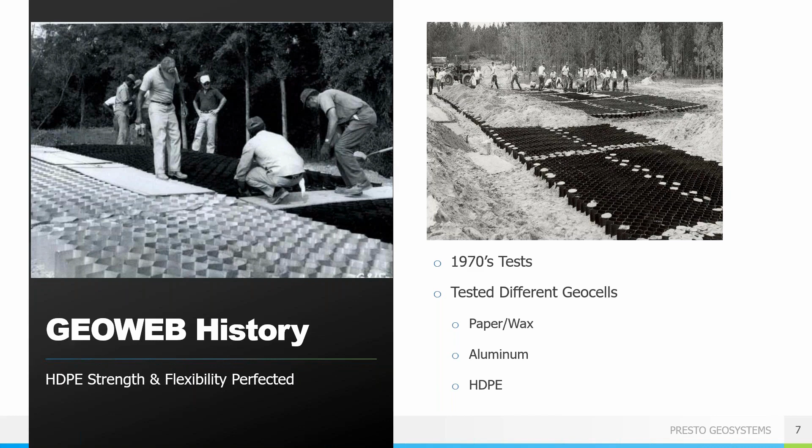As I mentioned, Presto worked with the Army Corps of Engineers to develop geocell technology. While other materials such as cardboard and aluminum were tested, high-density polyethylene, or HDPE, was the chosen material due to its lightweight, flexible nature and the fact that it is inert to nearly all chemicals and climate conditions.

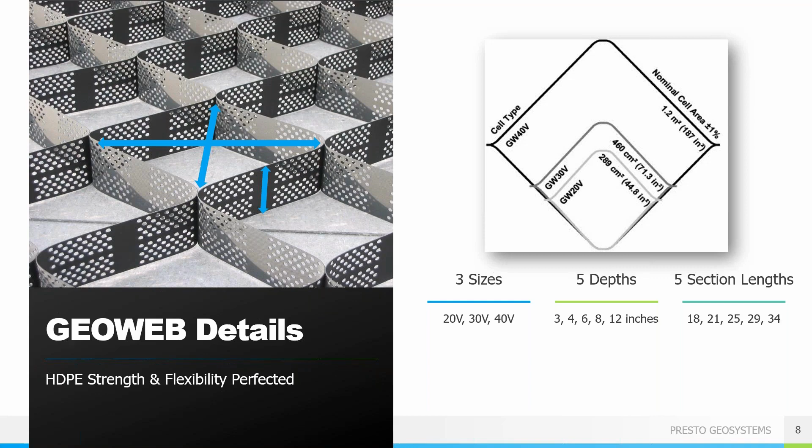The GeoWeb system consists of 2 main attributes: cell size and cell depth. The cells come in 3 diameters: small, medium, and large, which we refer to as our 20, 30, and 40V, and heights of 3, 4, 6, 8, and 12 inches. Cell aperture and height are selected following an evaluation of project-specific needs and site conditions. To facilitate installation, we offer 5 different section lengths, which will help to minimize the amount of field cutting that needs to be done.

The ultrasonically welded seam, where all of the connecting points are, is very important to the function of a geocell. The stronger the seam strength, the better the performance of the geocell will be. A strong seam allows for heavier infill material, steeper and taller slopes, and better lifetime performance. GeoWeb is produced using high-quality virgin, high-density polyethylene resin for consistently strong welds at cell junctions, while also maintaining semi-rigid ductile properties within the cell walls, high stress crack resistance, and overall toughness and long-term durability in the environment.

Our geocells do not use fillers or exotic polymer alloy blends, which can ultimately reduce weld strength and environmental stress crack resistance, and that are offered in some competing products in the name of increasing cell wall stiffness. To avoid weld failures and the damaging effects of differential settlement, uniformity in performance across all elements of a geocell system is much more important than stiffness alone.

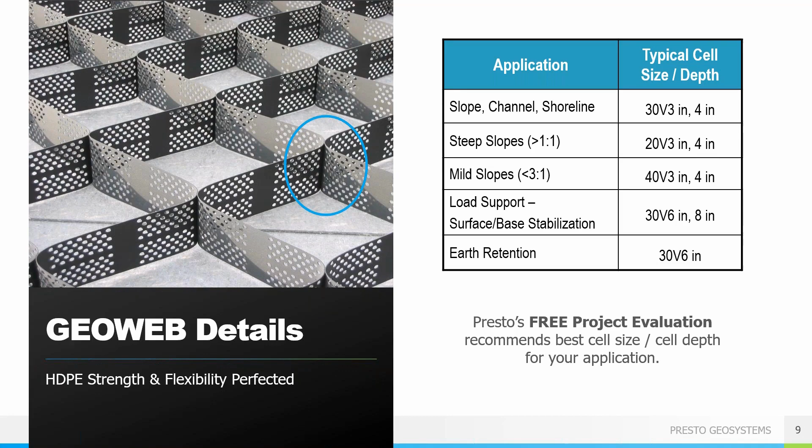There are three main infill types for any GeoWeb application, depending on the type of protection needed: topsoil, aggregates and granular soils, and concrete. In most cases, geocells allow for the use of on-site materials without the need to import fill, generally with the only limiting factors being that the material should be angular and the maximum particle size should be about 1/3 the cell depth.

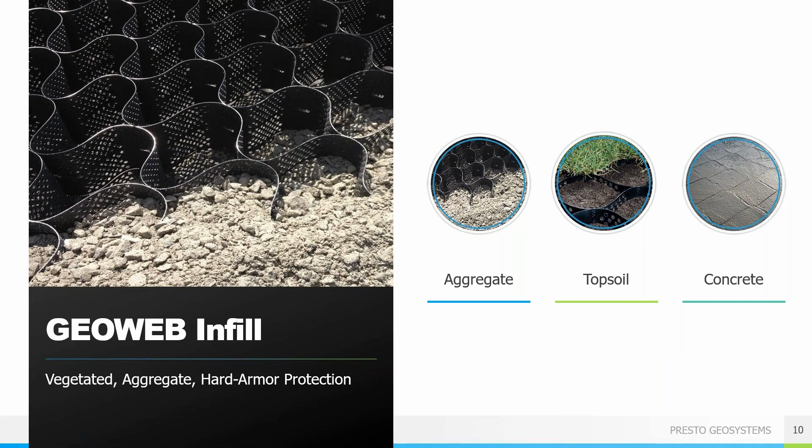The nominal width for each section is 8.5 feet. But you can make them longer and skinnier or shorter and wider, but we do want you to keep that width dimension between about 7.5 and 9.3 feet. The length will depend on the amount of expansion and the number of strips welded together.

Standard length is about 27 feet, but they can go anywhere from 16 to 58 feet. And then we can fit about 100,000 to 200,000 square feet on a truckload, depending on cell size and cell depth.

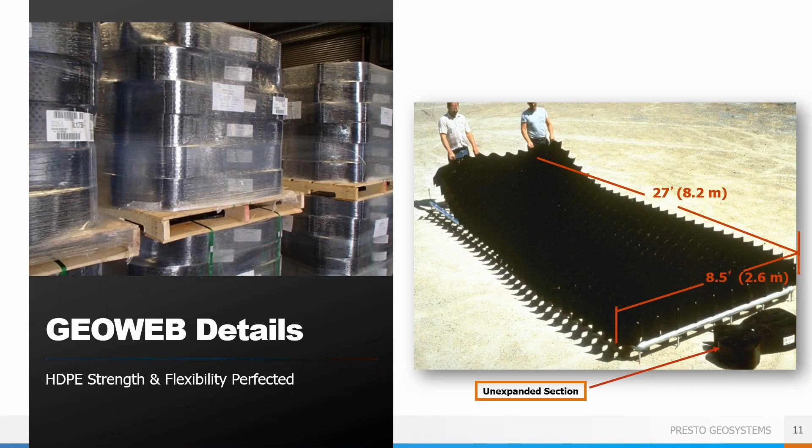In order for a geocell system to perform uniformly, it is critical that both the factory welded junctions or internal junctions and field joint junctions that connect individual panels, the mechanical junctions, perform at a level that is commensurate with that of the cell walls.

The three primary elements of any geocell system, cell walls, internal junctions, and connectors, must perform uniformly as a complete system. Therefore, an incremental improvement in one characteristic is only valuable if a complementary improvement has been made to the other components of the system.

GeoWeb is manufactured using a proprietary blend of high-quality virgin HDPE, and our formulation has stood the test of time for more than 40 years, and again, contains no fillers, unstable polymer combinations, or exotic polymer alloys.

For most typical sites, GeoWeb will retain its durability, with lab testing indicating 149 years without degradation, even at full exposure to the elements. We stand behind our numbers so you can deliver certainty in the solution as you build with materials you can trust.

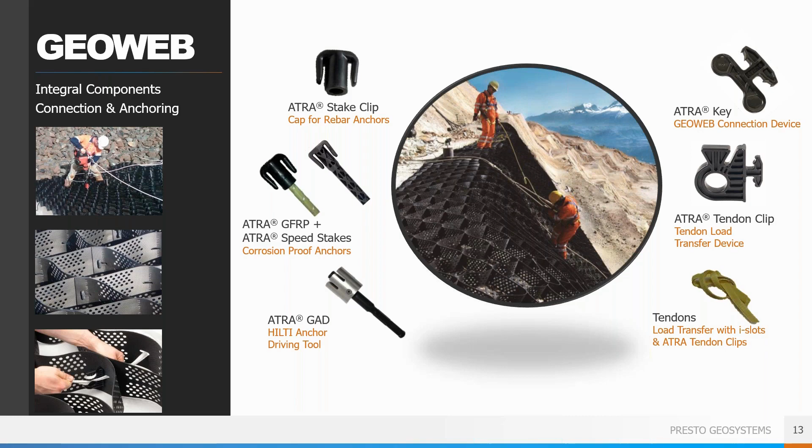Presto's GeoWeb is equipped with numerous design and construction components that increase strength and speed of installation. We have a variety of staking options, with the standard method being to use our Atra stake clip on top of a 1/2-inch diameter rebar. But if long-term corrosion is a concern, we can also provide fiberglass reinforced or plastic stakes.

Atra keys are the mechanical connection that I mentioned in the previous slide. Not only do Atra keys provide the uniformity we discussed, but they are made of the same HDPE material as the GeoWeb itself, so will last just as long. Beware of manufacturers that recommend staples or nylon cable ties, as these do not have the same long-term durability as HDPE.

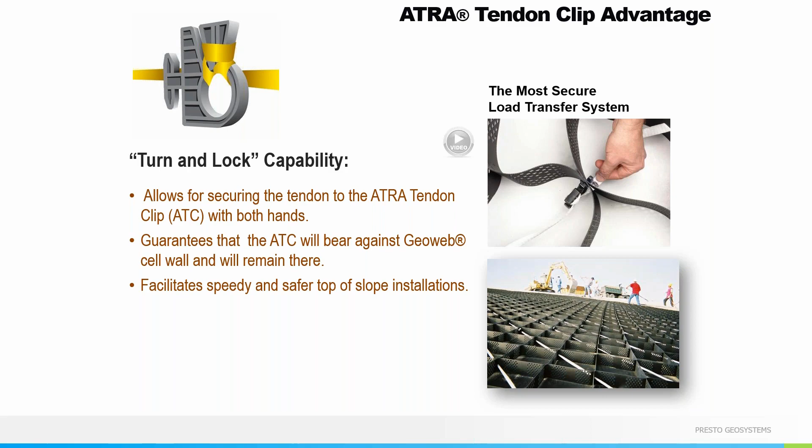The tendon and ATRA tendon clip system is ideal for anchoring the GeoWeb on slopes without the need for stakes, which would penetrate the liners that are used on most landfills. The tendons are tied to either earth anchors or a deadman pipe, which can typically be buried in the same trench as the liner at the crest.

Now we'll go a little more in depth on each of the landfill relevant application areas, starting with load support. GeoWeb can be used for both surface stabilization of unpaved roads and base stabilization below pavements. Many solid waste facilities must contend with maintaining unpaved access roads.

Not only can GeoWeb save money up front by allowing you to reduce your overall cross section, but incorporating GeoWeb into the roadway section can also minimize or reduce annual costs associated with repair and maintenance of unpaved landfill roads that take a beating from heavy equipment and truck traffic.

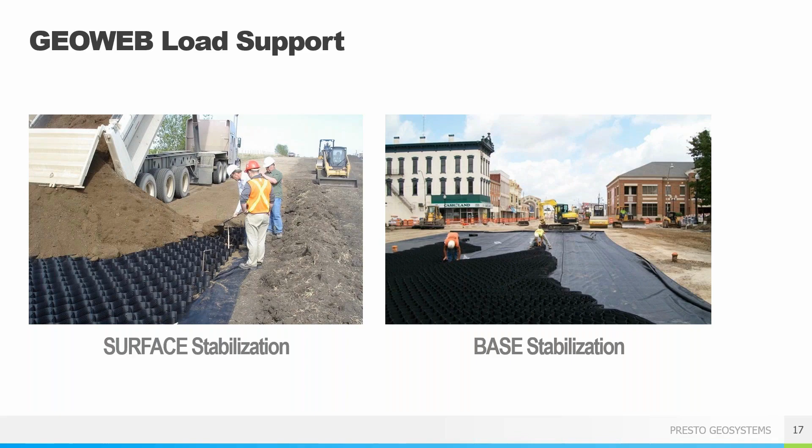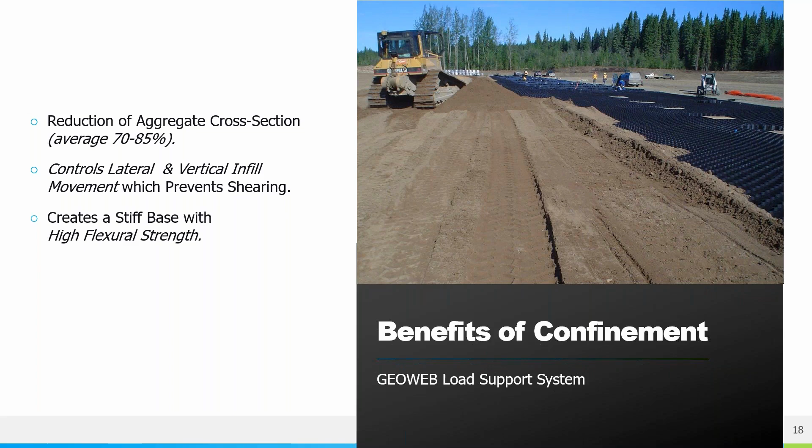Generally speaking, the benefits of using GeoWeb in load support applications are it will allow you to reduce your overall aggregate cross section by 70% or more. It'll control lateral and vertical infill movement, which will prevent shearing, and it creates a stiff base with a high flexural strength.

Here's how the GeoWeb three-dimensional system works in load support. When a vertical load is applied, the active earth pressure in the loaded cell pushes back against the passive earth pressure in the adjacent cell to form a stable system. So each cell helps support the ones around it.

The GeoWeb cell walls also transfer hoop stress, which is important in keeping the system intact and creates a mattress effect. The strength of the seams around each cell, the material properties of the individual strips, and the connection method between panels are all important factors in determining how the Geocell system can improve site conditions. Strong seams, semi-ductile resin properties, and integrated connections are critical to a well-performing system.

The GeoWeb system and accessories are specifically designed to work together to be an effective solution for roads in soft soil locations.

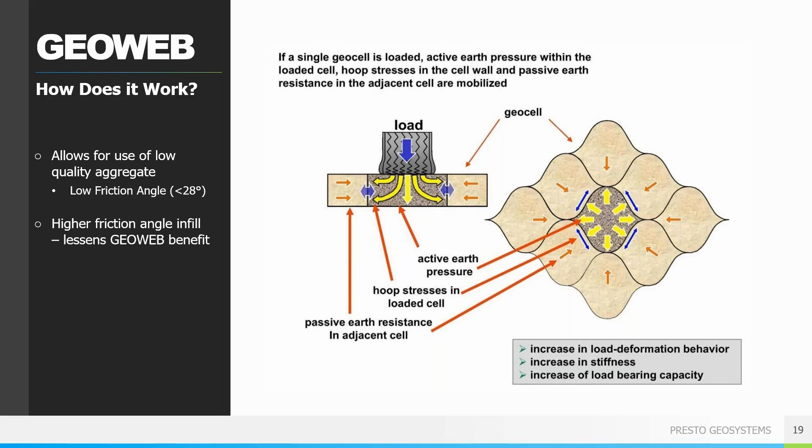Here you can see the stresses on the subgrade, with the unsupported subgrade on the left and the GeoWeb reinforcement on the right. Notice how there is a complete elimination of the highest stresses at the surface when using GeoWeb reinforcement. The stresses are reduced and distributed over a wider area, known as the mattress effect. This mattress effect reduces the stress reaching the subgrade and leads to a significant decrease in deflection and rutting.

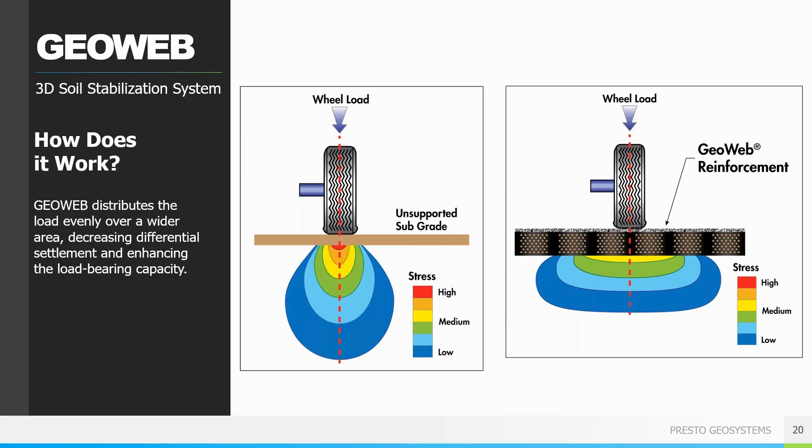I want to quickly review a little of the research that we've done in the past to help increase your confidence in the use of GeoWeb.

This first test started with a supersaturated peat mixture that was put under varying loading. Over the peat, the GeoWeb section was placed and infilled with gravel. Settlement plates were placed throughout the GeoWeb section prior to its placement, and a load beam was placed over the GeoWeb and loaded to failure.

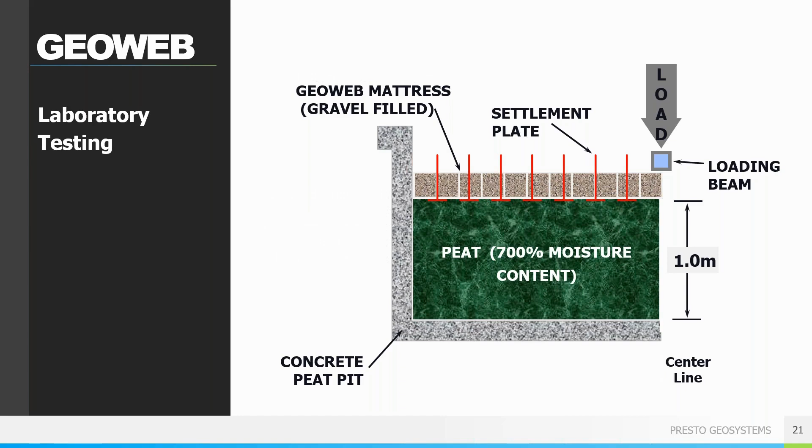We compared this to the same depth of unconfined aggregate. The peat pit test showed that bases reinforced with GeoWeb provide a significant improvement over unreinforced soils. For a loading of 1,000 pounds per foot, a 4-inch rut depth occurred with GeoWeb in the section, compared to 20 inches without the GeoWeb.

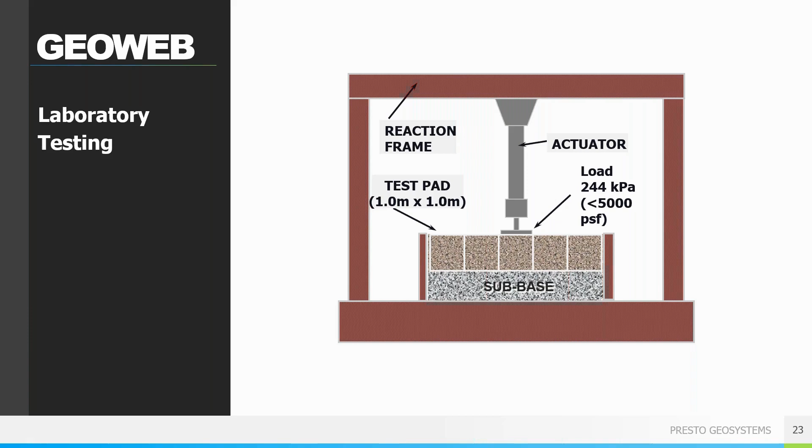Since the previous testing was under static loads, we also went ahead and did a dynamic load test. Here the pavement load testing compared unreinforced and reinforced materials over the same subgrade. A deflection of 0.6 of an inch is assumed to lead to failure of the pavement system, so we applied the load repeatedly until that 0.6 inch of accumulated deformation occurred.

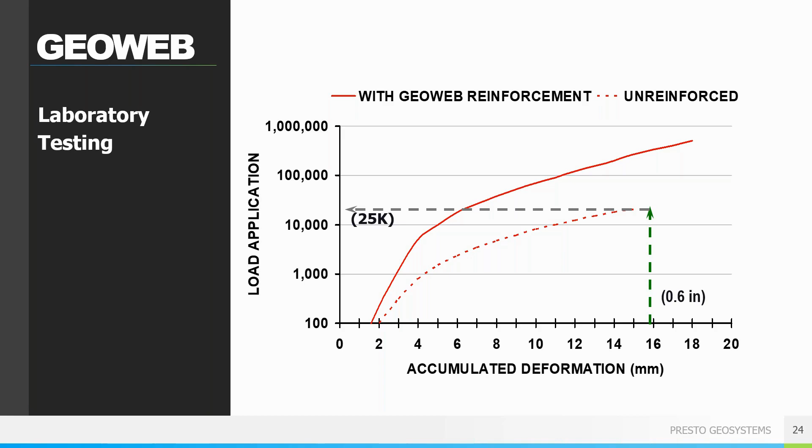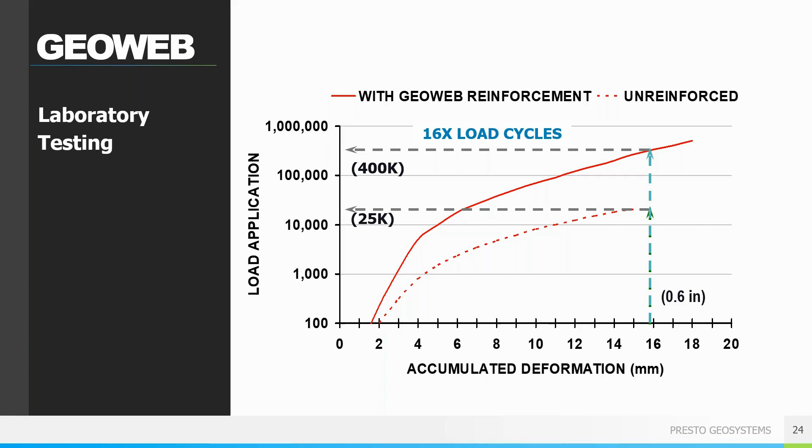Without the GeoWeb in the section, it took 25,000 load cycles to reach this failure point. By adding GeoWeb, we were able to achieve 400,000 load cycles, an improvement of 16 times the number of load cycles for the very same deformation.

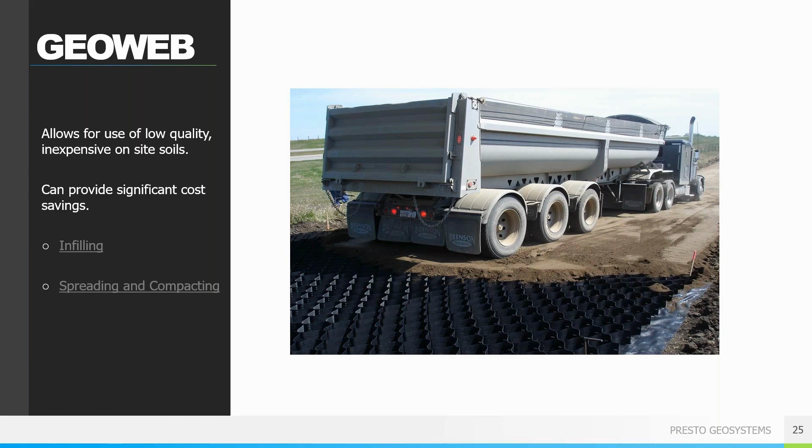A typical GeoWeb section has a geotextile below the cells, which can range from a 6-ounce non-woven up to an enhanced woven, depending on your subgrade strength and maximum loads. Then the GeoWeb is typically filled with granular material, and we recommend a 2-inch wearing surface over the top of the cells.

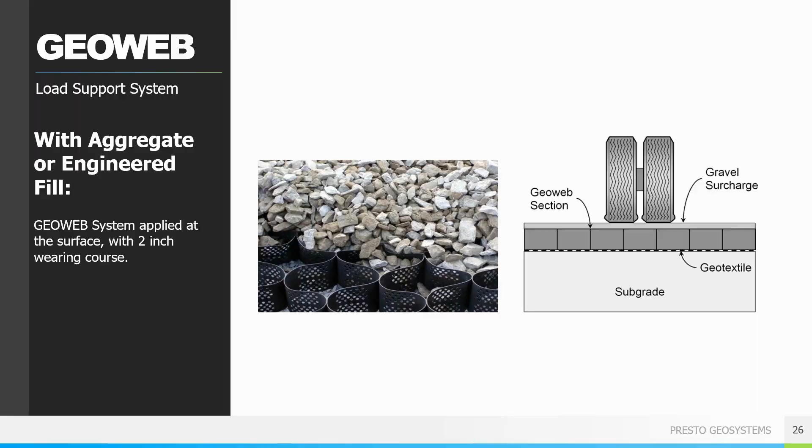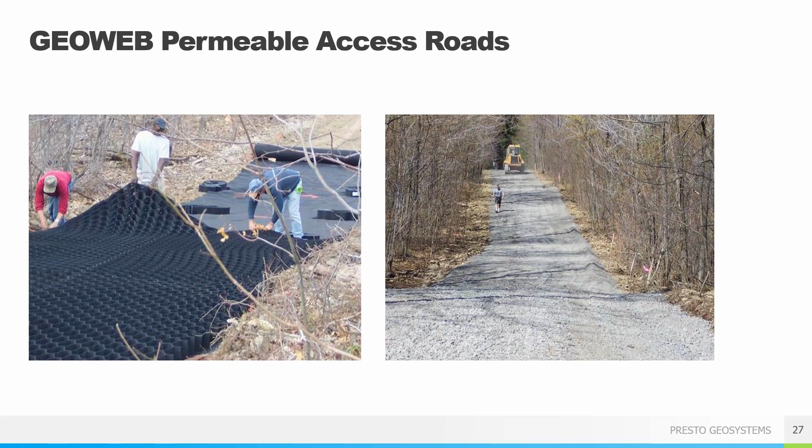Now we can look at a few examples. Here the GeoWeb allowed for a structurally sound road to be built with clean stone infill. Without the GeoWeb, the stone would move with even one vehicle pass. The clean stone and GeoWeb perforations combine to allow this road through a wetland to be permitted, because water can flow through the cross section and we don't create any sort of a dam through the wetland area.

Keep in mind, you get infiltration with clean stone only. The permeability of your infill is going to be your limiting factor.

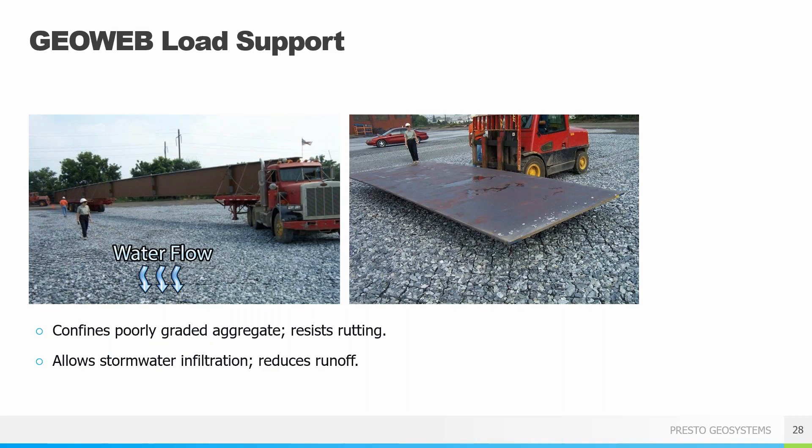Here, an 8-inch GeoWeb and an aggregate with 40% void space was used. This allowed for about 3 1/4 inches of rainwater to be stored in the pavement section, eliminating the need for additional stormwater infrastructure. You can also see the extremely heavy loads that are able to be handled by the GeoWeb system.

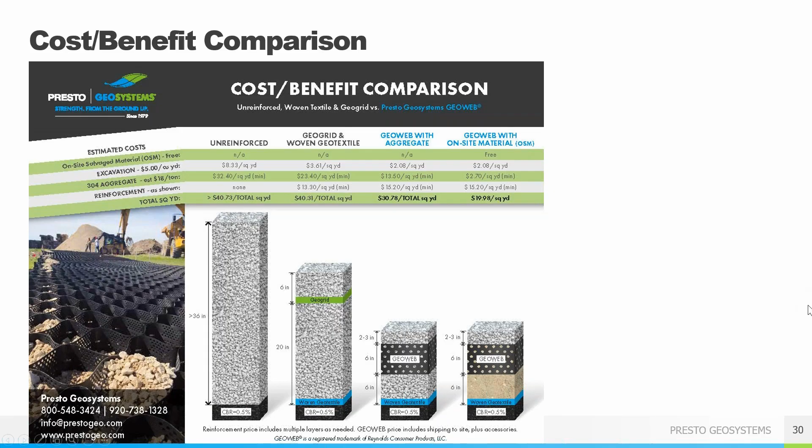We'll now move on to discuss how GeoWeb can be used in stormwater conveyance, a critical component of any landfill design.

Open channel designs with the GeoWeb 3-dimensional system offer a more economical solution than riprap, gabion baskets, or reinforced concrete, all systems that are expensive and hard to place and maintain.

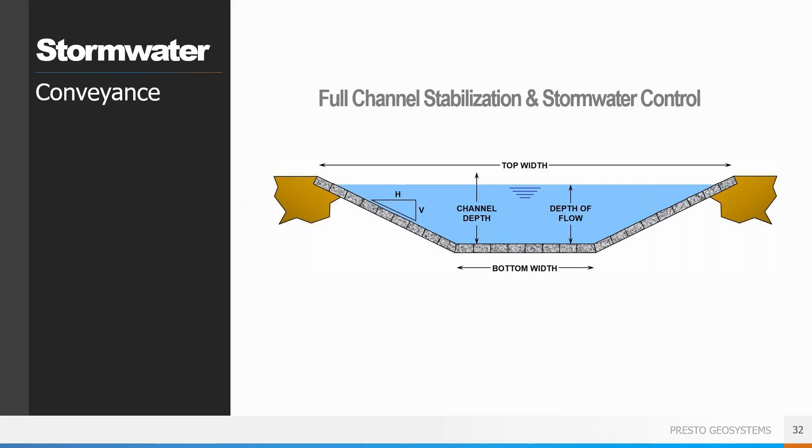The cellular network creates a system of check dams that protect the upper soil or aggregate layer from hydrological erosive forces that impact unconfined material. They're much more effective than two-dimensional solutions such as turf reinforcement mats and erosion control blankets that can be subject to undermining.

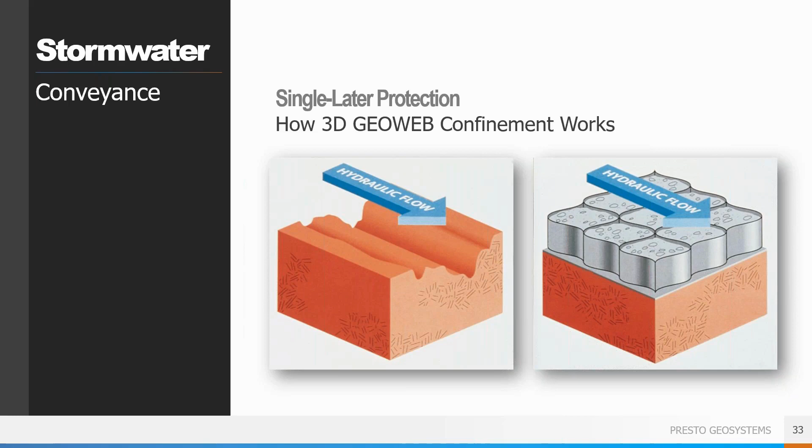The benefits of using GeoWeb in channels include that it will improve the hydraulic performance of whatever infill material you use. With vegetation, we will also promote infiltration and reduce runoff. With aggregate, we can allow for the use of smaller, less expensive rock. And then with concrete, we don't need any other forms or reinforcement. And the system will flex with subgrade deformation, minimizing cracking. Additionally, you can reduce your concrete thickness, leading to significant cost savings.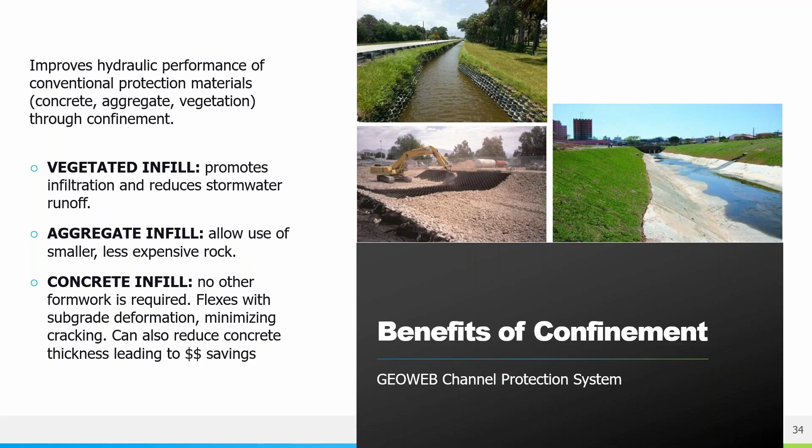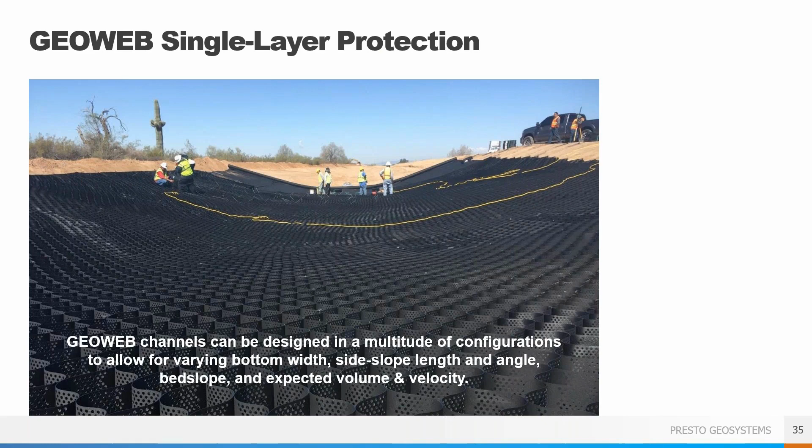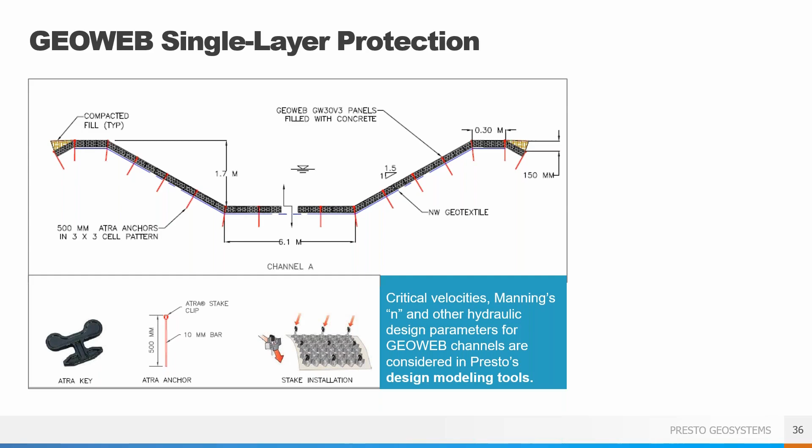Now we'll look at how GeoWeb works with the various infill options, starting with topsoil and vegetation. Generally speaking, low flow channels like stormwater containment facilities and stormwater channels can be armored with topsoil filled GeoWeb and covered with an erosion control blanket.

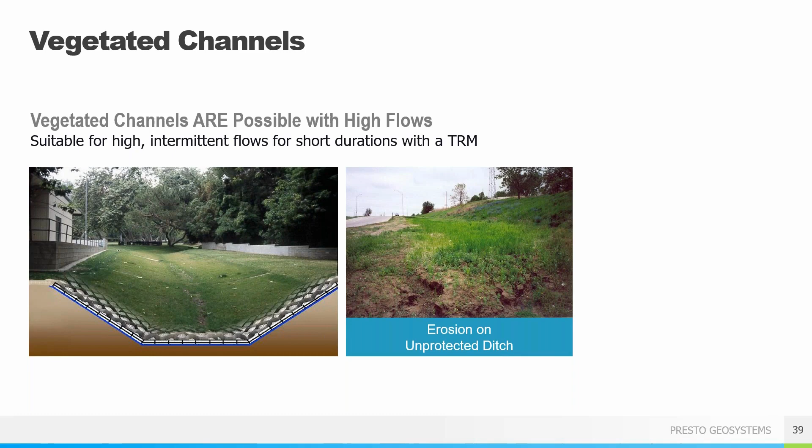But even in high flow situations, we have a solution that can allow you to protect channels from erosion and maintain the aesthetics of vegetation. This solution involves topsoil filled cells covered with a turf reinforcement mat, or TRM.

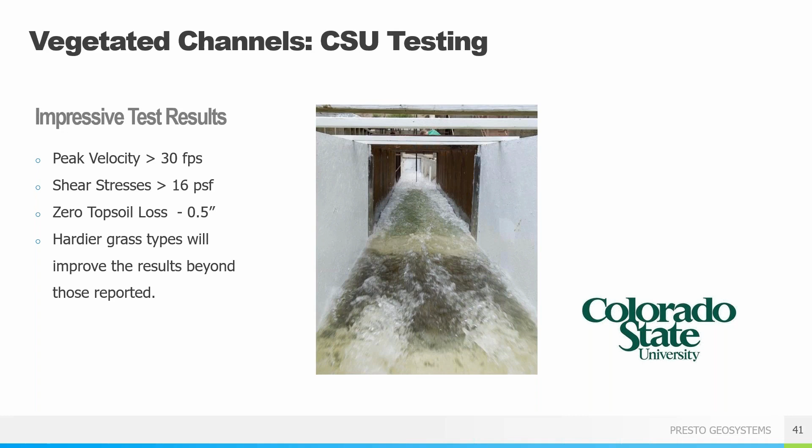We tested this vegetated solution covered with a mid-grade TRM, not one of the newer high performance TRMs, and received great results. You can see that it was able to withstand 29 feet per second and 16 pounds of shear, which is more than twice the hydraulic resistance of 12-inch riprap and about double the performance of the new high-performance TRMs alone. It works so well because the TRM provides a cover for the GeoWeb so the cells won't scour out during high flow.

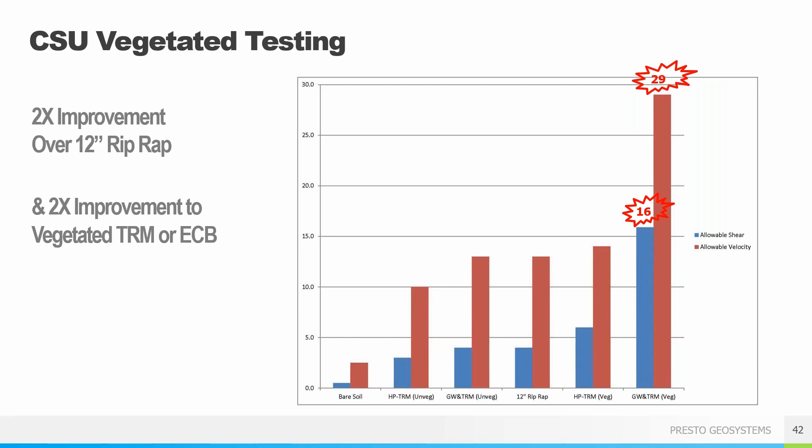And what the GeoWeb does is confine the soil directly below the turf reinforcement mat so the system won't fail when saturated. In an unvegetated condition, GeoWeb will also improve the hydraulic performance of a TRM alone by 30%.

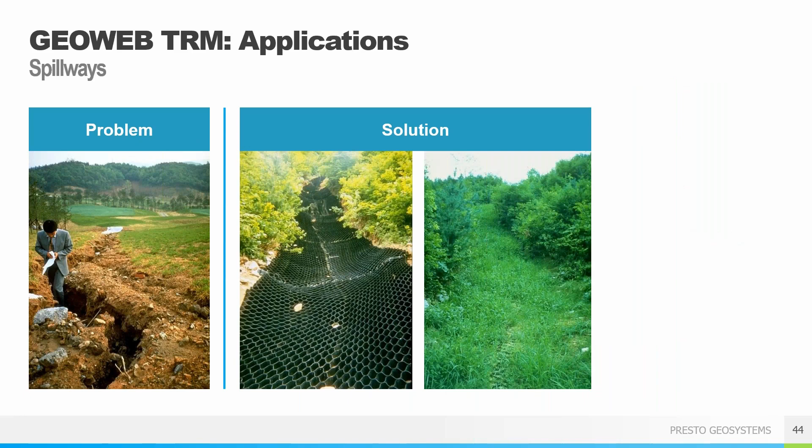Typical applications for this system include roadside ditches, spillways, channel embankments, or dam and pond overflow systems. It's really suitable for any situation where you have very high velocities but short duration flows. And it will allow you to maintain vegetation in areas that would previously have been concrete or very large riprap.

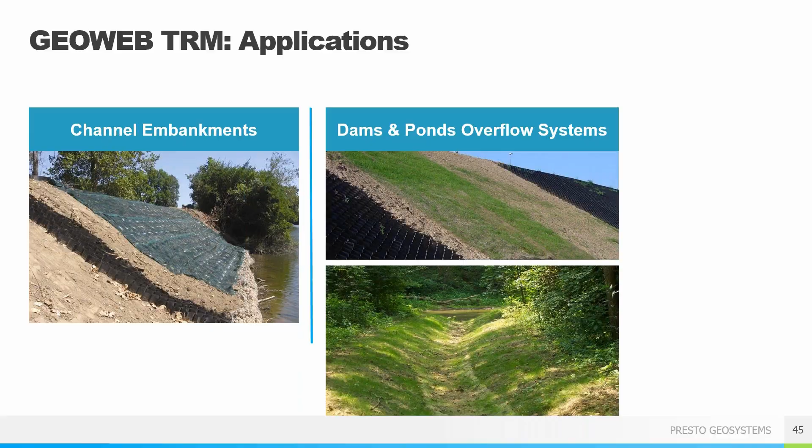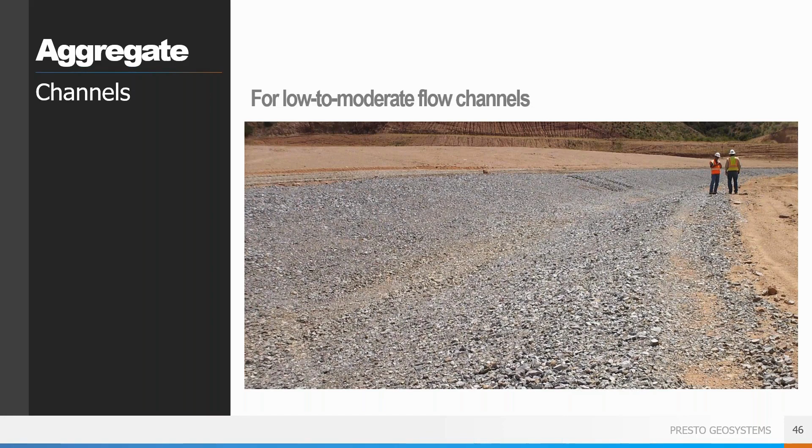We can also provide an aggregate filled solution. Generally, aggregate is going to be used in arid regions where vegetation is difficult to establish, or for areas that are typically underwater and vegetation, again, cannot be established.

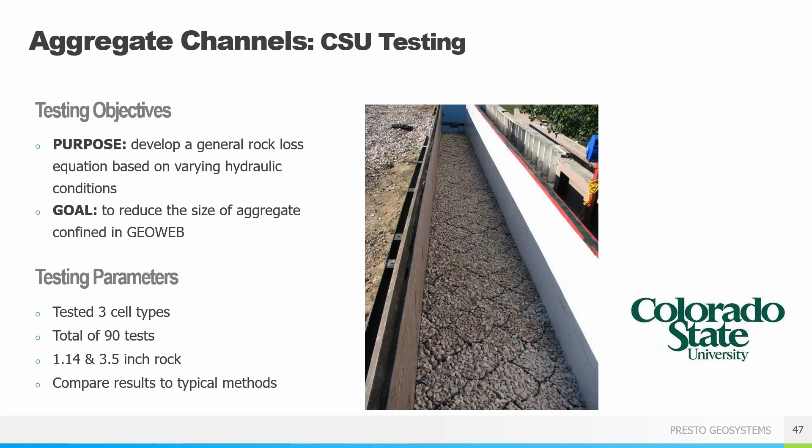So with the aggregate test, we ran a total of 90 different tests using 3 different cell sizes and 2 different rock sizes, with the goal being to develop a general rock loss equation based on varying hydraulic conditions. And with all of these data points, that allowed for the creation of a regression equation. So now, given the bed slope and unit discharge of a particular channel, we can manipulate the rock size and the cell size until we get to a point where your rock loss L is 0.

When compared to traditional riprap sizing tools by Abt and the Corps of Engineers, we can reduce rock size anywhere from 2 to 10 times, which can lead to significant savings in rock cost as well as transportation and installation costs. I should point out that the large variance in your rock reduction is going to be due to bed slope. The flatter the bed slope, the greater we're able to reduce your rock size.

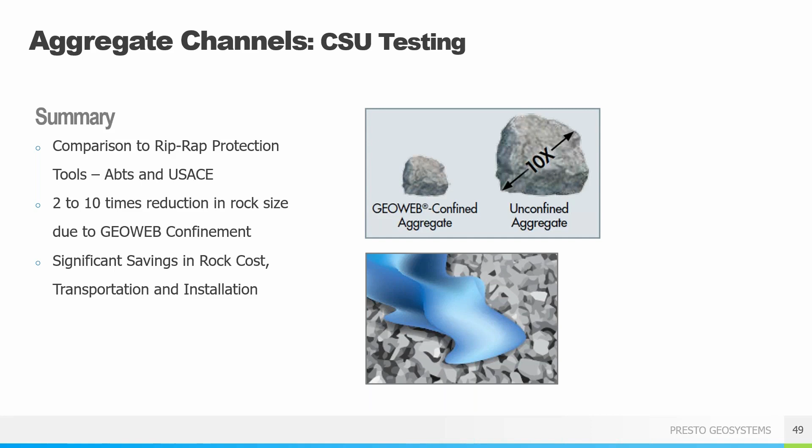And finally, for your most challenging applications, we can provide a concrete-filled GeoWeb. In this case, the concrete is poured in place with no additional forms or reinforcement required, as the cell walls function as both. It also allows for easier placement of higher slump concrete.

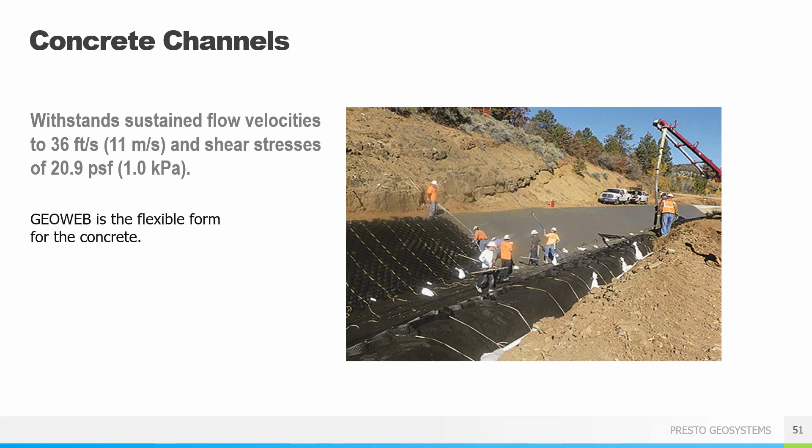It's a flexible system that will withstand settlement very well, which is quite important in landfill applications. We also assure uniform concrete depth because you just fill right to the top of the cell walls. Typically we can replace a 5 or 6 inch depth of reinforced concrete with just 3-inch GeoWeb filled with the very same concrete.

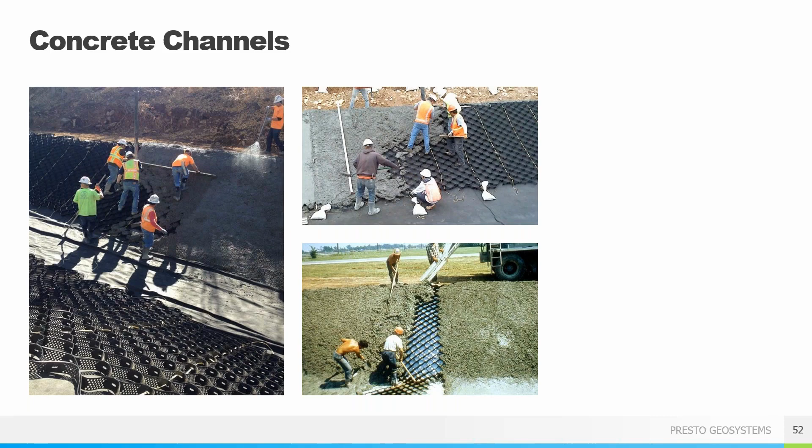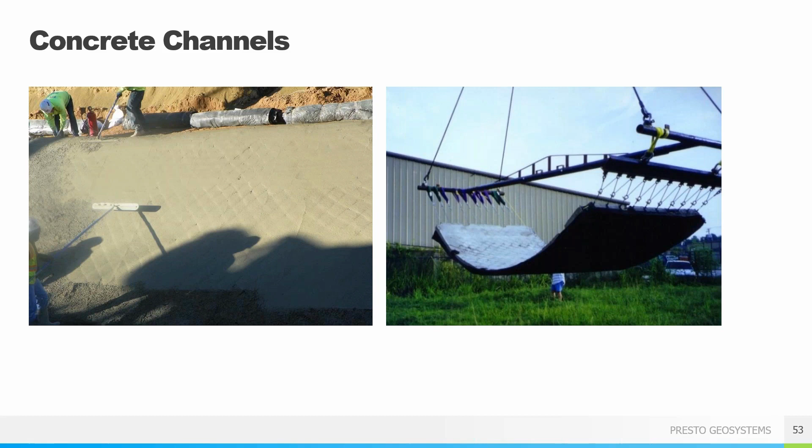Once anchored in the channel, the GeoWeb allows concrete to be pumped or poured right into the cells, and again we screed it right to the top of the cell walls. Notice the flexibility of the concrete-filled GeoWeb panel in the photo on the right - it's not going to crack like poured-in-place concrete will.

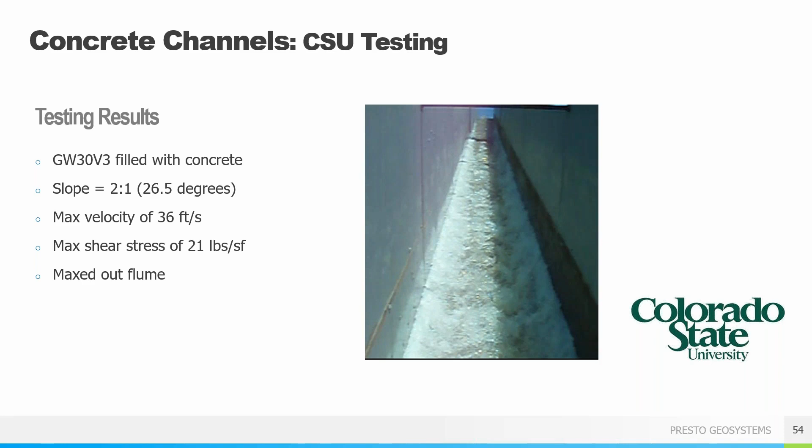Again, the system was tested at Colorado State with very impressive results. Our mid-sized cell, just 3 inches deep, was able to withstand 36 feet per second and 21 pounds of shear. We actually didn't even fail the system, but rather maxed out the flume.

Now a few examples. The regional municipality of Waterloo in Ontario, Canada, faced the challenge of creating an effective yet simple method of erosion prevention while removing stormwater from their newly capped cell at the Cambridge landfill. The protection system had to be durable and stable under a variety of hydraulic and mechanical stresses.

Concrete-filled 4-inch deep GeoWeb panels were selected due to previous in-ground success with the system, the ability of the concrete to limit vegetation growth in the bottom of the channel, and the overall flexibility of the system to conform to potential subgrade movement.

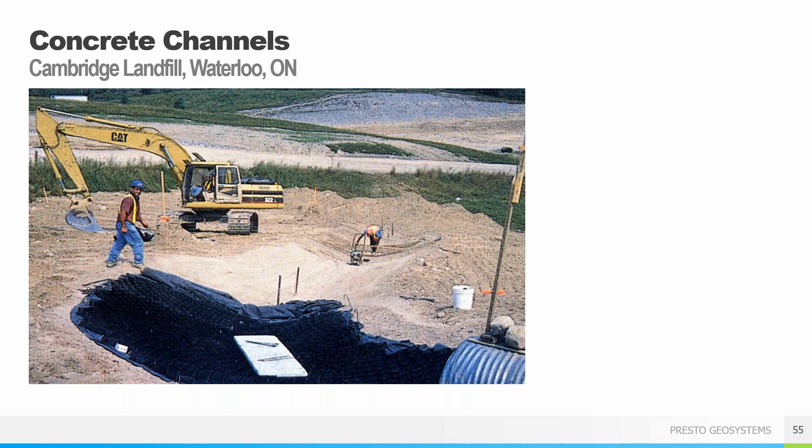A total of 15,000 square feet of GeoWeb was installed at the landfill, and the system was anchored with stakes in channels varying from 7 to 20 feet wide, with bed slopes of up to 14.5%.

The perforated GeoWeb system maximizes the mechanical bond between the concrete and the cell walls, locking the concrete infill into the individual cells of the system. The concrete-filled system forms a uniform thickness mat which controls concrete quantities and costs. The system prevents uncontrolled cracking of the concrete and reduces the chances of piping or undermining.

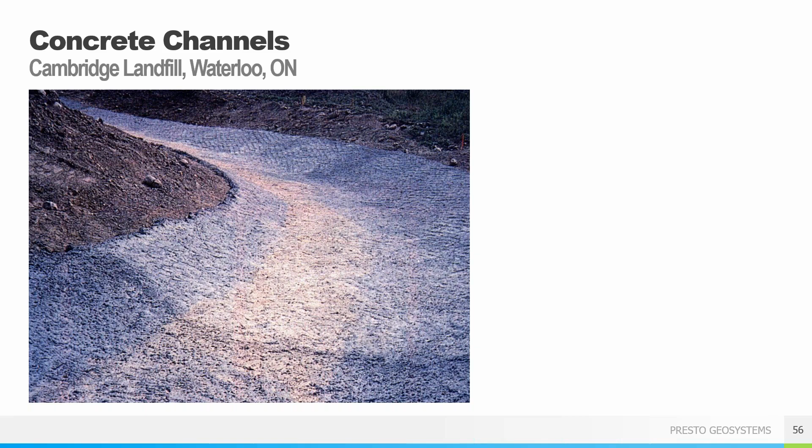Next up is a project that we did at a landfill in Hong Kong. And here's some of the specifics.

Used at a Hong Kong landfill, it also incorporated energy dissipators, which were designed using recommendations provided in design of small dams by the U.S. Bureau of Reclamation. This is a 460-foot drop from top to bottom with design flow rates of 350 cubic feet per second. They also expected a maximum differential settlement to be over 30 feet within the first 15 years.

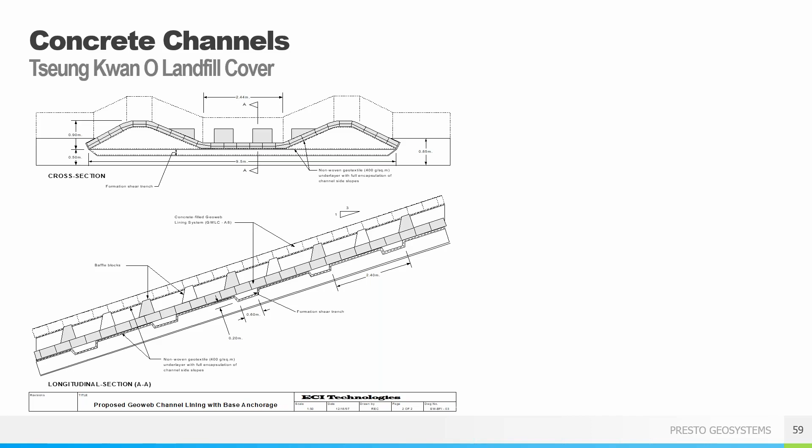Here we can see the location of the baffle blocks, which were used for energy dissipation in both cross-section and longitudinal section. The blocks were placed in the channel invert as well as on the side slopes, approximately every 8 feet downstream.

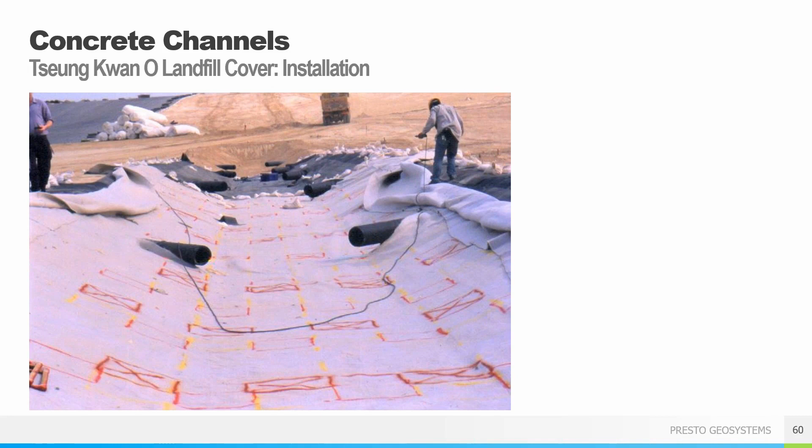Now we'll take a closer look at the installation. Here you can see the X's that were placed on the geotextile underlayment to mark the location of the energy dissipator blocks. The GeoWeb was then placed and cut at the block locations to make room for the energy dissipators.

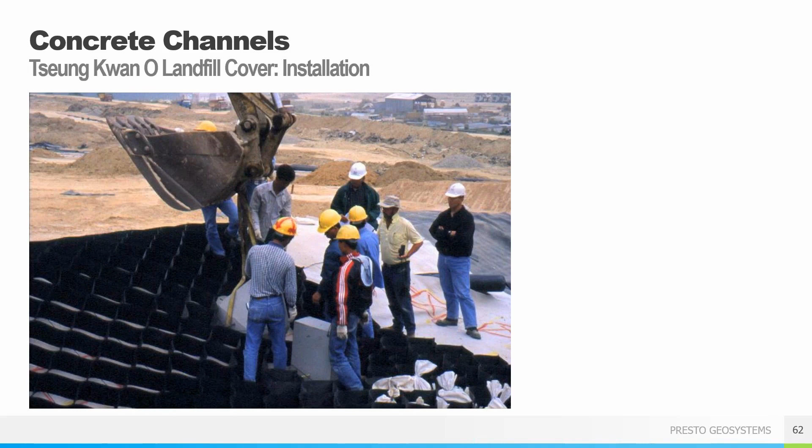Next, the blocks, which weighed about 500 pounds each, were placed. It's hard to see here, but the blocks are tapered from bottom to top. This way, when the concrete is poured into the cells, the blocks are locked into place.

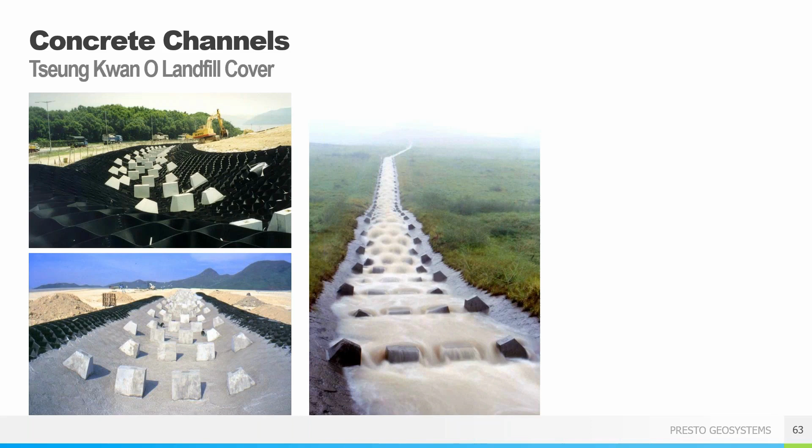Finally, the concrete was poured with some of the slopes being in excess of 20%. Note the change in infill type with concrete on the bottom and up the sides, transitioning to topsoil and vegetation at the crest and on the back side of the berms. With the GeoWeb system, transitioning to different infills to handle various hydraulic conditions is quite easy.

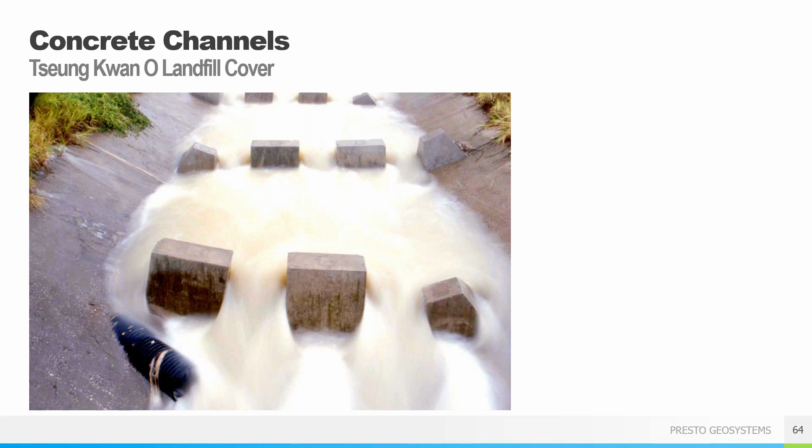The channels drain not only the top of the landfill, but also drain across the landfill through flexible piping buried a few feet below grade. We can see one of those pipes in this photo here.

As mentioned earlier, tendons and ATRA tendon clips allow for anchorage without penetrating geomembranes. Tendons, which can be either polyester, polypropylene, or Kevlar, are either tied to a buried deadman pipe or earth anchors, and the entire system is draped from the crest, with the tendon clips serving to distribute the load so as to not overstress any of the welds. The number and type of tendons, as well as the clip spacing, are provided as part of the evaluation process.

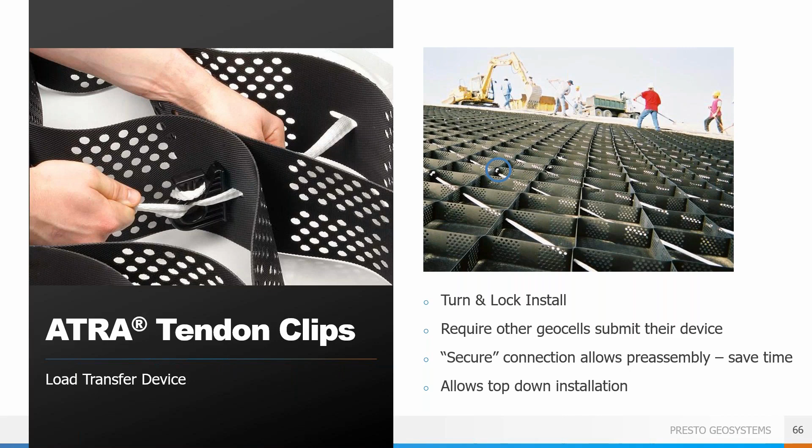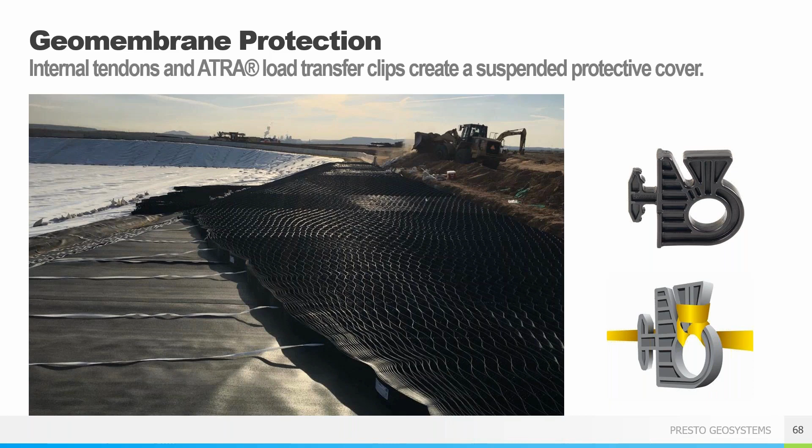Here's a borax mine in Southern California, again using tendons and tendon clips over a liner. In this case, the GEOWEB was used for an access ramp into a large containment pond for cleanout operations, and it was placed at a 45-degree angle across and down the slope for the access.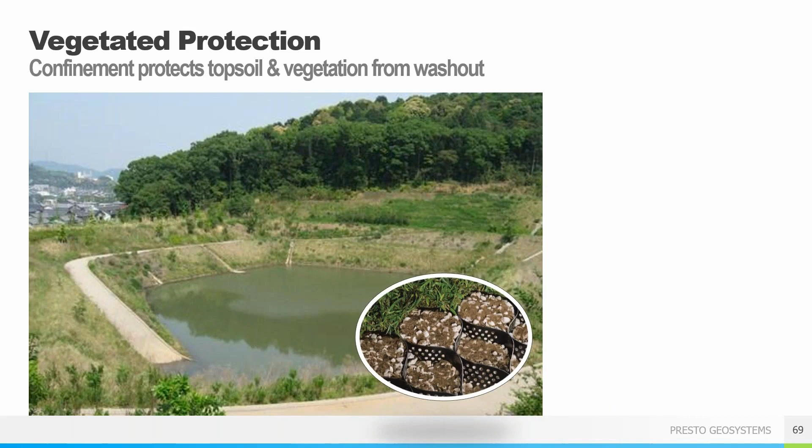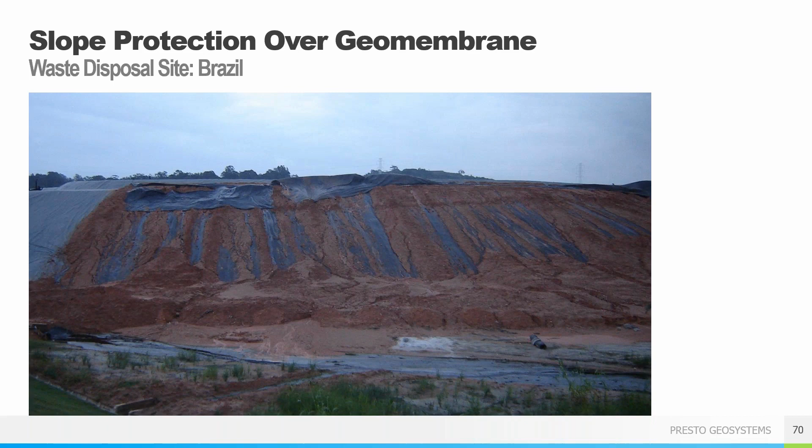In vegetated solutions, confinement prevents topsoil from washing out during rain events and/or with fluctuating water levels. Here's another project, this one at a waste disposal site in Brazil. You can see we have significant erosion after the failure of the initial two-dimensional cover system that was selected.

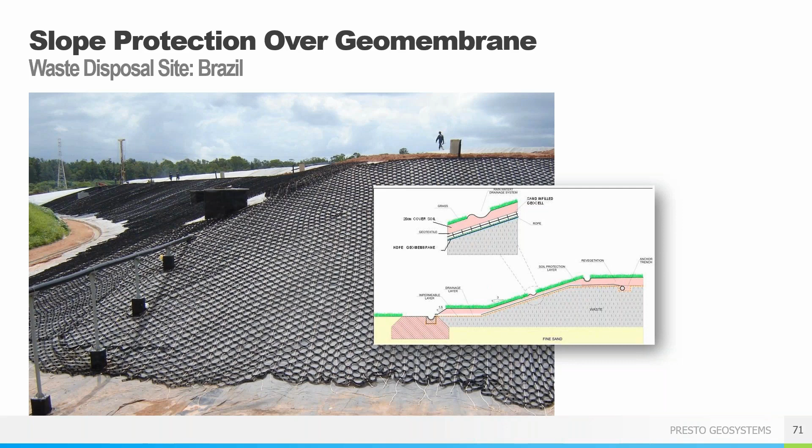Here's the permanent solution, consisted of a geomembrane covered by the GEOWEB, which is anchored using the tendon system. Many times the deadman pipe can be placed in the same anchor trench as the liner for ease of construction. One year after the installation, we've got a fully vegetated, erosion-resistant vegetated cap in place.

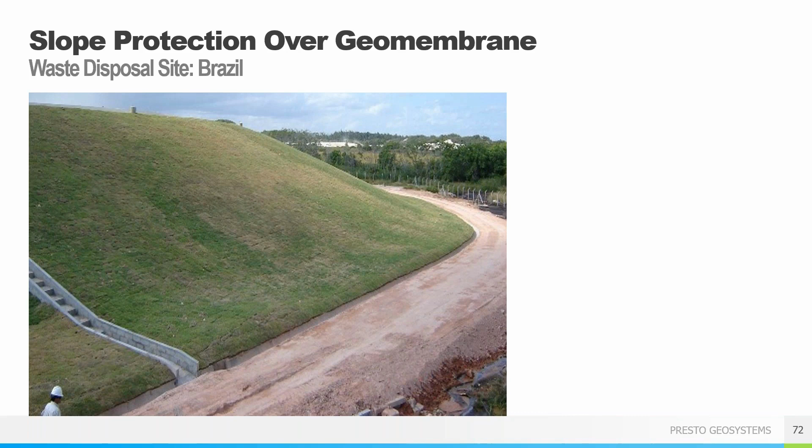Here we have a highway slope where iron pyrite was exposed during excavation. When exposed to air and moisture, there's the potential for acidic runoff with elevated concentrations of contaminants. Here the slopes were covered with a geomembrane, and aggregate-filled GEOWEB was placed over the liner as a protective layer. The slopes were up to 1.5 to 1 and up to 200 feet high. While not a landfill, landfill design principles were used.

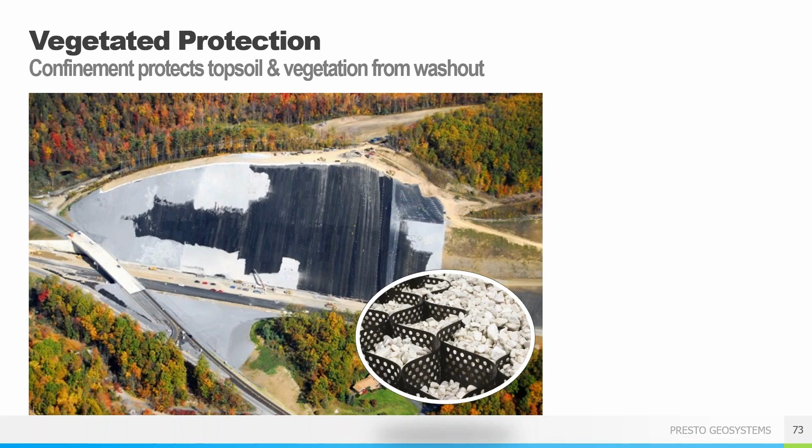Finally, a project from 1997 that does not involve a geomembrane, but rather preventing erosion of a 200-foot high slope at 1.5 to 1, and the slope was basically shale. This is at a solid waste transfer station in Jefferson County, Alabama. Other solutions were looked at, such as riprap, which was too expensive, and building a retaining wall at the bottom of the slope to collect the inevitable erosion, which would require too much maintenance.

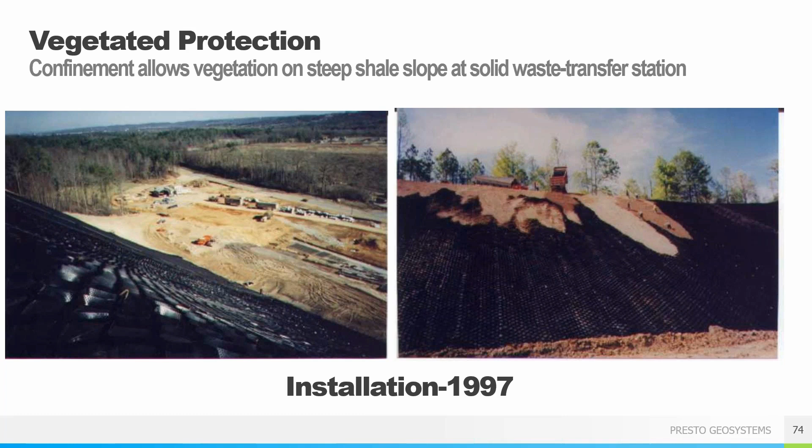Eventually, the solution that was selected included a 4-ounce non-woven geotextile to provide separation and an in-plane drainage layer, and then 3-inch topsoil-filled GEOWEB panels. The system was then hydroseeded and an erosion control blanket was installed. Normally hydroseeding and using erosion blanket is an either-or proposition. The idea here was to create a complete system that would eliminate the need for any chance of future maintenance being needed.

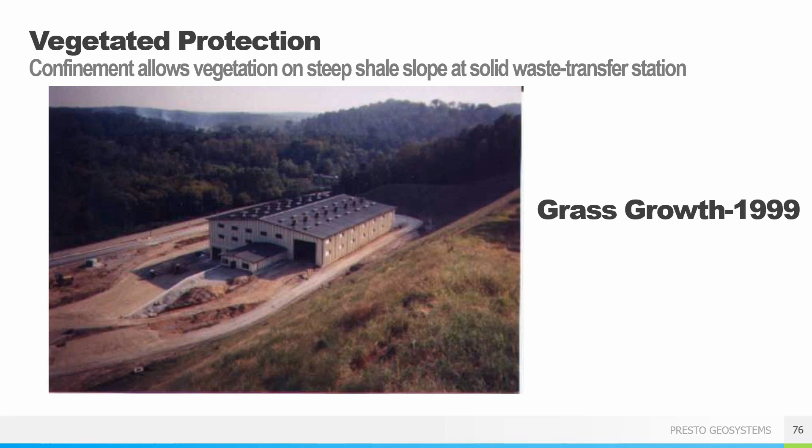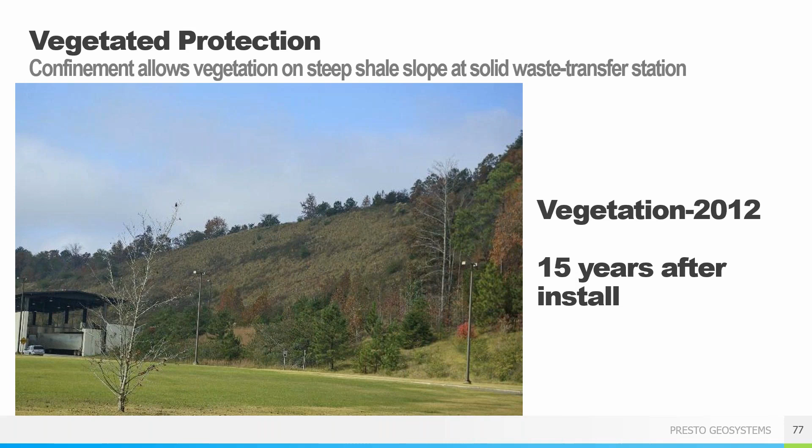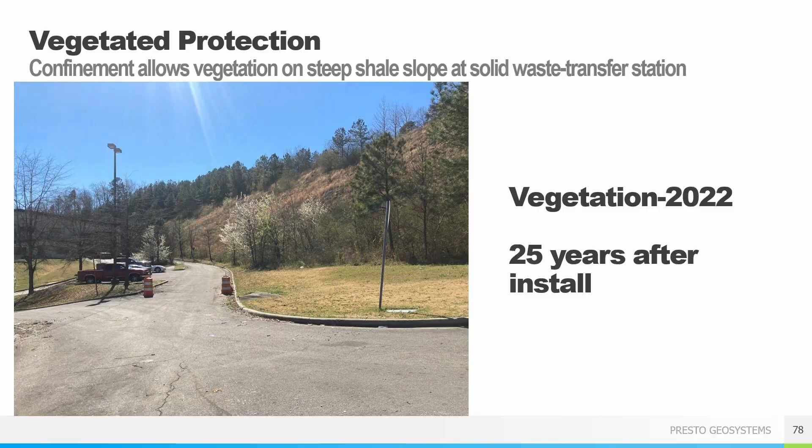In summary, every project is different, but the GEOWEB system has a solution that is right for you. The GEOWEB system can be added to road projects to provide a more stable and longer lasting surface course for unpaved areas, which will reduce maintenance and repairs. For paved surfaces, GEOWEB decreases pressure on the subgrade to reduce differential and long-term settlement, which will extend pavement life. The ability to use low-quality aggregate or even sand can save a significant amount of money.

Whether you are looking to stabilize your roadway, protect your embankments, or manage your stormwater runoff, the GEOWEB system has great flexibility of design to meet your project needs. And it is a complete system solution for ease of installation and peace of mind.

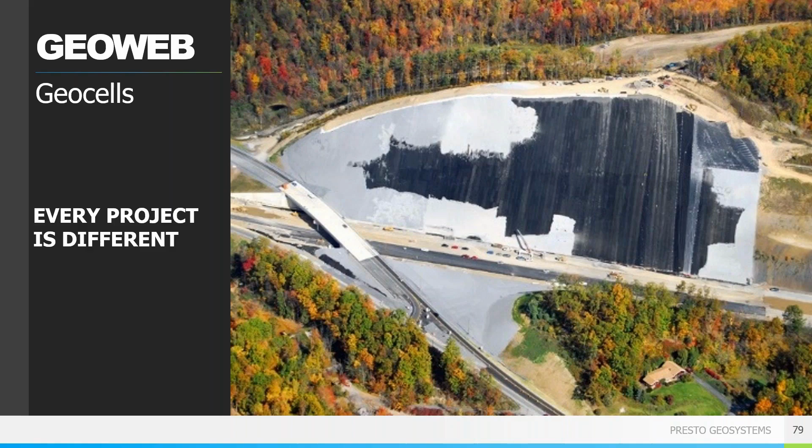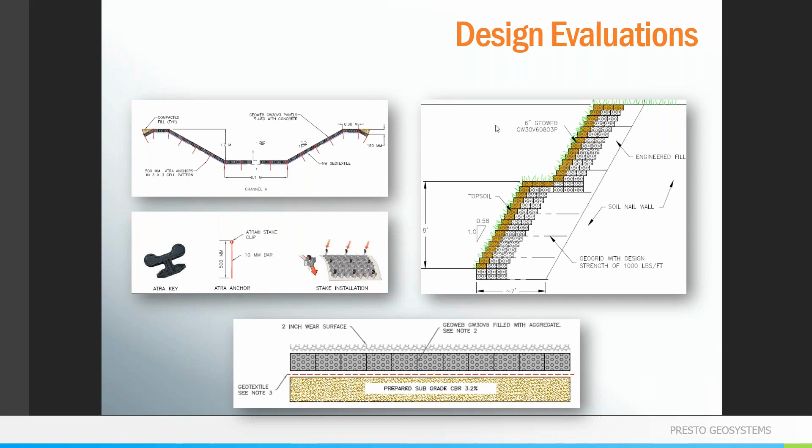Within 3 business days, but usually faster, we provide a complete design evaluation, including infill recommendations and anchorage requirements. We will work with you to get you the best design for your project.

We send project-specific CSI specs with each evaluation, but if you have the need or desire to create one on your own, we have a spec maker tool available on our website. This will allow you to create a full project-specific CSI spec as a Word document in a matter of a few minutes.

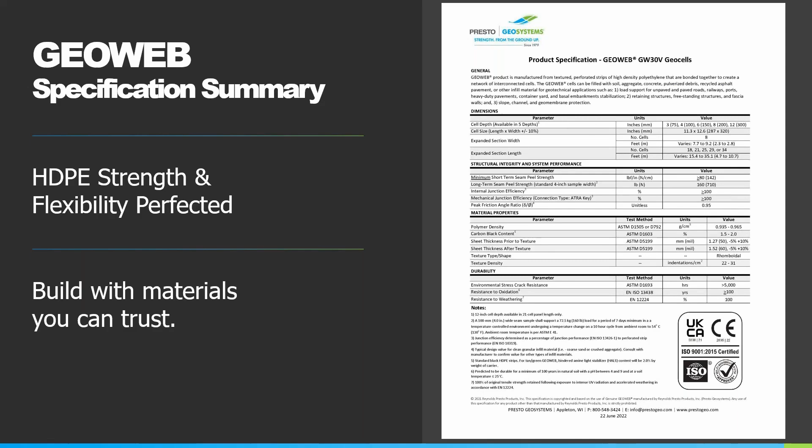We deliver quality and over 40 years of expertise, guaranteeing each shipment meets or exceeds our specs so you can deliver certainty and build with materials you can trust.

Hopefully we covered all of the learning objectives to your satisfaction. If you would like to discuss anything in more detail, you can contact me directly.

We've made it faster and easier for you to obtain your PDH certificates. With our webinar dashboard, you can easily view our library of webinars and download PDH certificates for on-demand webinars completed. Your webinar dashboard will keep a record of on-demand webinars completed along with PDHs earned.

Please note that certificates for live webinars are managed separately from the on-demand webinar dashboard, so you won't find your certificate from today in there, but you will receive an email from GoToWebinar within the next 24 hours containing a download link to obtain your PDH certificate. In 2 or 3 days, you will also receive a separate email from Presto Geosystems with more information about accessing the on-demand webinar dashboard with other helpful resources. If you do not receive either of the previously mentioned emails, please check your spam folder.